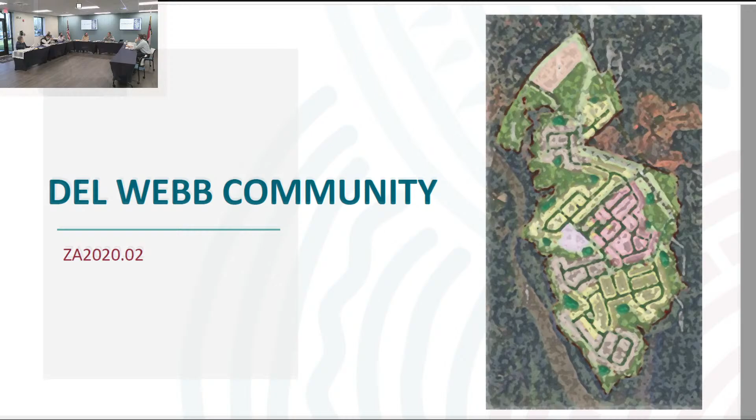Shelley is going to present on behalf of the city, and then the applicant will have 15 minutes to make their presentation, and included within Shelley's presentation will be Kimley-Horn, our transportation consultant. After they've presented, I'll open it up to the board for discussion, and then we'll open it up to the folks here to speak. So Shelley, turn it to you.

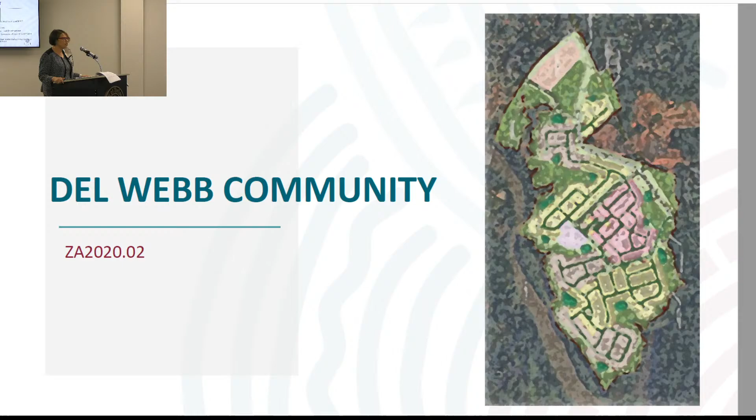Good evening, for the record I'm Shelley DeHart. I'm the project planner for the zoning map amendment, ZA 2020-02, proposed for Del Webb community. The request is to amend the city's official zoning map, changing the zoning classification for tax parcel ID 188444. The subject site is approximately 462 acres in size, located adjacent just south of Armstrong Ford Road. The property owner for this petition is Belmont number 1, US 321 74 Bypass, and Southeast Land Management. The applicant is Pulte Group.

Fred Matrulli is here tonight for Pulte. The applicant's representative is Bridget Grant of Moore and Van Allen.

This request is to change the existing zoning classification for the subject property. The existing zoning is general residential, traditional neighborhood development. This is unusual, having a property with two zoning classifications on it. It's considered a parallel zoning district, meaning today the property owner could request to develop the property either as general residential or traditional neighborhood development. Added on the base zoning is an overlay zone, which ties the subject property to the South Fork Small Area Plan. So with this request, that's the existing zoning.

They are proposing to establish a conditional zoning district that has both general residential and a neighborhood center commercial district within it. The intent is to accommodate an 809-unit, age-restricted residential community that includes a commercial village center located adjacent to Armstrong Ford Road. Now I'm going to take a minute to talk about conditional zoning action itself.

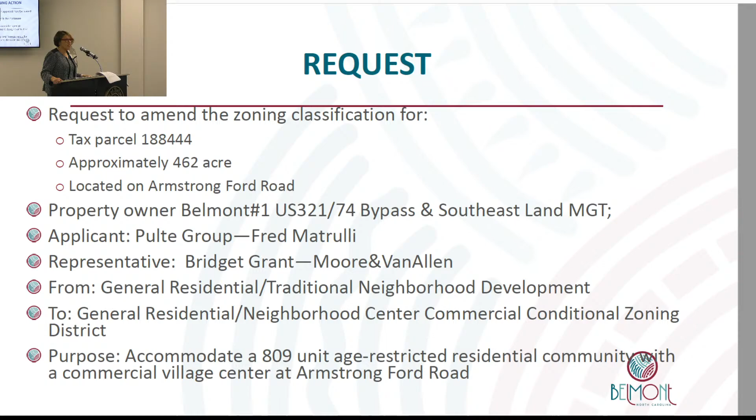There are two methods of reclassifying a zoning designation on a property. There's a conventional zoning process. It is legislative. With this action, conditions cannot be placed on the zoning action, nor can the decision makers consider any promises made that night, such as it only being this use, or even look at a site plan. So if a conventional zoning action is approved, it entitles development consistent with the minimum requirements of the zoning ordinance and all allowed uses within that zoning classification. That is one avenue for rezoning.

The second is a conditional zoning process. It too is a legislative action, but it provides the city with a very good tool to consider special limitations, conditions, and development design tied to the legislative decision. So basically, we are processing a zoning change along with a site plan that conditions can be placed on. The benefits of this avenue are collaboration, predictability, and transparency to benefit the community, the development team, as well as the city's decision makers.

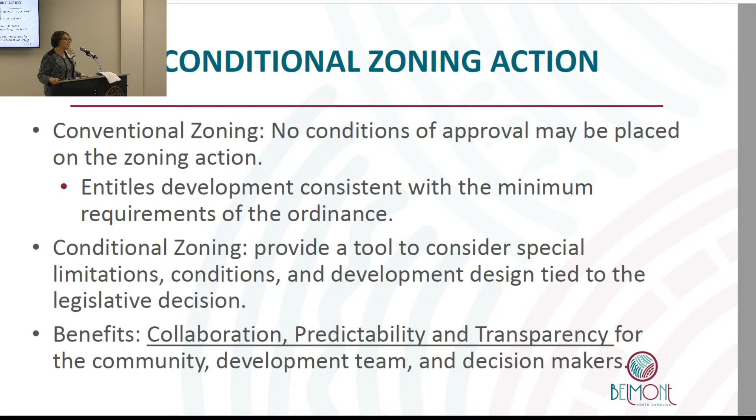So with that, I'm going to start with large pictures. The red star on the location map is the subject property, 462 acres in size. It is bounded on the west by the South Fork. To the north is Armstrong Ford Road. Across Armstrong Ford Road are two communities in Cramerton: Timberlake, an established residential community, and Courtyards at Cramerton, which is a community under development.

The property is bounded on its east side by existing residential communities in Belmont, South Point Ridge as well as Point Crossing. It is also bounded by the community of Amberley, still under development. The southern portion of the property is bounded by the waterfront, again the South Fork, and it is adjacent to about 600 additional acres of undeveloped property.

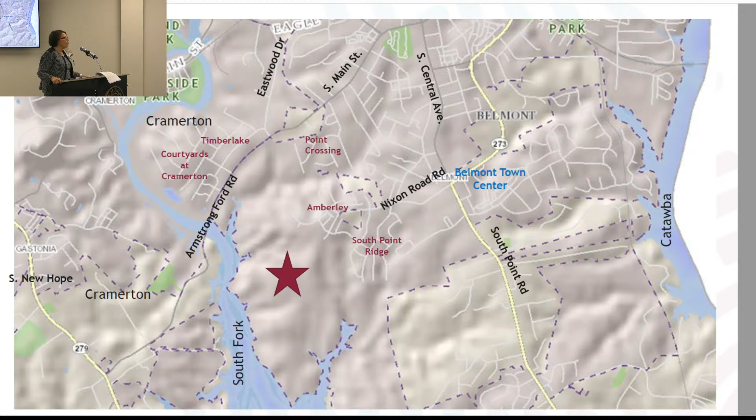The applicant's team approached the city back in 2019 with a vision for a Del Webb community, which is an age-restricted, single-family residential community. One of the first things we established with the development team is we take a look at the zoning to see if it's appropriate. We look at long-range plans, any adopted plans, and so forth as we move forward toward a development project.

The existing zoning, again, is a parallel district. It has a general residential TND designation. The striped overlay ties the subject property to the South Fork Small Area Plan. Many of you were involved in the adoption of the South Fork Small Area Plan. It was included with the update of the Comprehensive Land Use Plan.

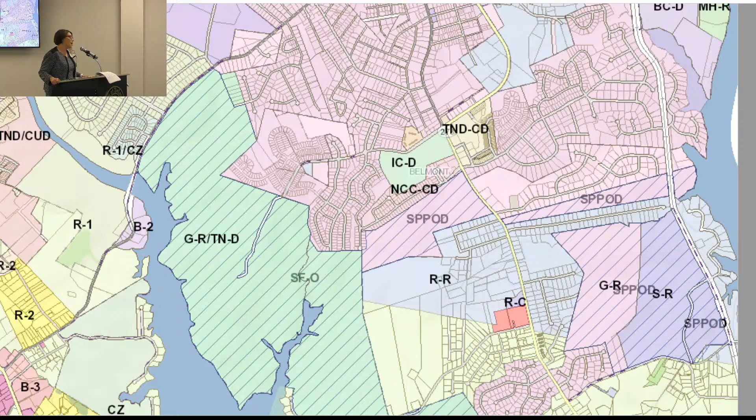Surrounding zoning of the subject site is primarily single-family residential in the communities of Cramerton as well as Belmont. There are a few conditional zoning districts - a small pod across the South Fork, a B2 commercial classification, and at the northeast corner of the property you'll see some bright purple adjacent to Eastwood, north of Armstrong Ford Road. That is an industrial designation, and the property is used as such.

So I mentioned the South Fork Small Area Plan - that is the map to the left. This was adopted in 2018, processed during the comprehensive land use update. You may recall the city was taking large zoning actions on vacant properties zoned general residential to help bring down the density. The property owners approached the city and asked if they could enter into a memorandum of understanding to give them time to develop a small area plan.

They developed and paid for the small area plan, which was included in the comprehensive land use plan. The map on the left, the big white star, represents the subject property. What was envisioned and adopted by the city for this area was a mixed use village as a whole. The subject property has 3 identified mixed use villages.

That's the red area. There's a large one at the intersection of Nixon Road and the future South Fork Parkway. Mixed-use villages are intended to have multifamily development as well as commercial.

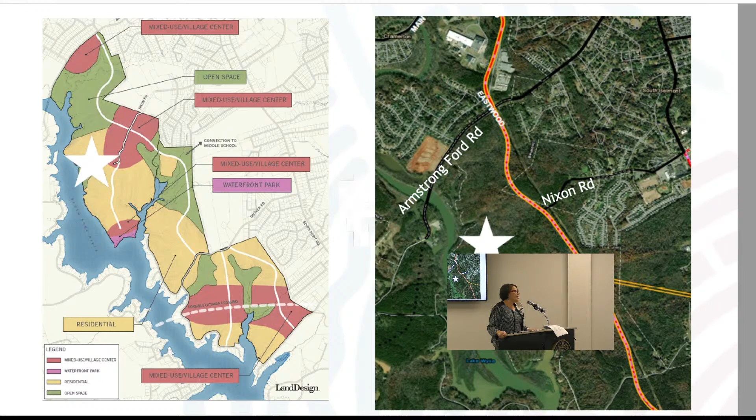The green area on the plan represented the anticipation of open space throughout the area based on environmental constraints such as steep slopes and streams, etc. The bulk of the project, the gold color, is identified for residential use in the form of single-family residential at a maximum density of 3 dwelling units to the acre. So the subject property has these various areas: 3 mixed-use villages, a large area for single-family residential, open space, and a waterfront park.

Now I want you to take note of the white line that follows the eastern boundary of this entire small area plan. That is the South Fork Parkway. That is a very important planned road for the city.

It is proposed to be a 4-lane divided boulevard with landscape median, bike lanes, curb gutter, sidewalk, street trees, etc. This is intended to provide a relief road to South Point Road. It's a north-south running road that goes down the peninsula, again parallel to South Point Road.

So speaking with the applicant, they spoke to us about their vision. We showed them the city's vision for that area. The aerial photograph on the right side of the screen, the orange line, again, is the South Fork Parkway. This is a plan that was provided to us by the local MPO in coordination with NCDOT.

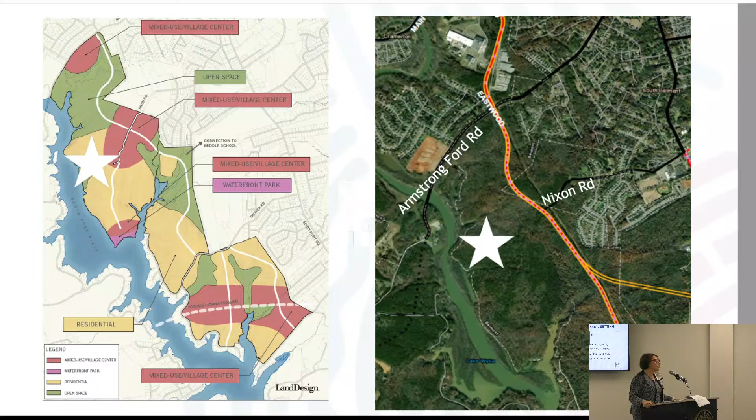Another area of concern, besides the visioning, is the natural setting of the property. This property has diverse topography. It has an intermittent stream located in the northern portion of the property. There's floodplain, wetlands, as well as adjacent to the South Fork, which is considered an impaired waterway.

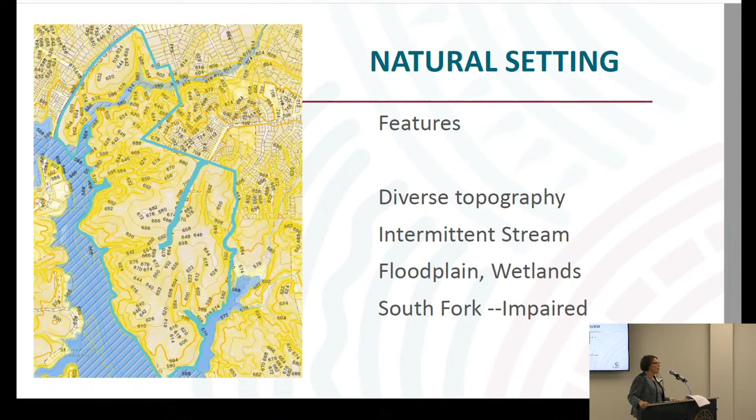After sharing all of this information with the applicant, what they present tonight is the project based on the various plans and visioning of both the applicant and the city. They are proposing an age-restricted community, a Del Webb community, with 809 single-family detached home lots on 449 acres of the subject property. That equates to about 1.8 dwelling units per acre.

There's approximately 100 acres of open space, 106 acres of tree canopy preservation, that's 25% of the site, and it would be placed within a tree conservation easement during the platting and construction plan phase. There's an associated roadway network that does include the future 4-lane divided road, referred to locally as the South Fork Parkway, as well as off-site intersection improvements tied to a traffic study.

And we'll get into some of these topics as we move forward. There's a future neighborhood commercial center on 13 acres where there was a medium-sized planned mixed-use village center. Based on the needs of the developer and the topography and such, the plan does request relief in the area of minimum lot width and maximum block length for some of the internal streets to the development that exceed 660 linear feet.

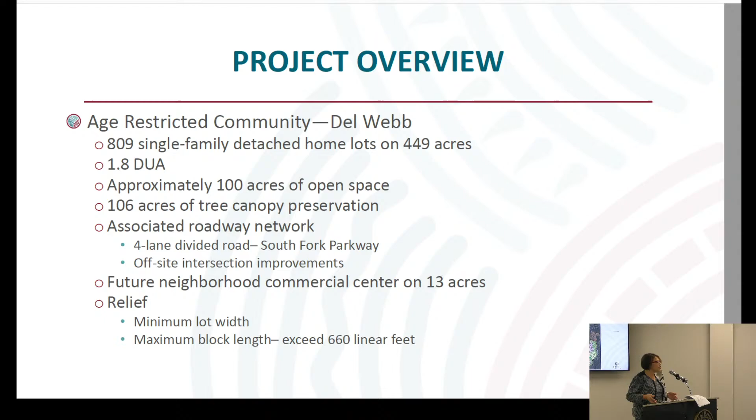So what does that look like in a plan? You have this plan before you, provided on the screen. I'll point out some features. The small area plan identified a medium-sized village center. This is a 13-acre village center. They are proposing to restrict it to non-residential uses.

The project does include a waterfront public park, not at the southern tip as the plan showed, but based on the needs of the development, the Del Webb community, and better public access to a public park feature. They are proposing it in the northern end of the development, adjacent to Armstrong Ford Road.

There's also 2.7 miles of a waterfront natural greenway trail that they're proposing to build. The trail will start in the public park area at the north, follow the waterfront area all the way around the southern tip, and it does end in a location that would have the ability to be connected to if the property to the south is proposed to be developed.

The project, consistent with the long-range plans and adopted plans, does include the South Fork Parkway. There's about a mile of the South Fork Parkway within the project area. They're proposing to build 0.73 of a mile of the full 120-foot build-out, that's the 4-lane boulevard as envisioned. The northern portion that was proposed to connect to Eastwood is proposed to be dedicated as future right-of-way. We will go into details as to why that is proposed this way as we move forward in the transportation section. The project also includes 22% open space, which exceeds the minimum requirement.

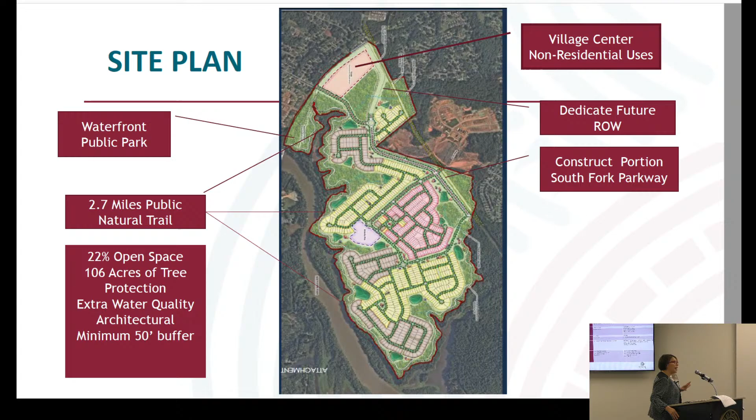This is hard to see from this distance, so I'll turn this way. What's on the screen is a table of performance standards tied to the general residential zone. The use and building types permitted in the general residential zone is residential use, but the building type can be either single-family detached homes or some alley-fed product. That could be a single-family detached home with alley access, or actually townhomes. So if it was a by-right development, they could propose 30% of the total 809 units to be townhomes, that would equate to about 240 units. They're committing to all single-family detached homes that are street front loaded.

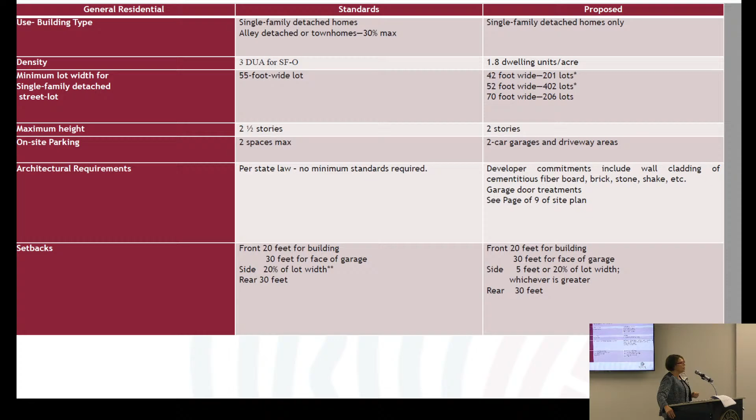The density permitted in the zone, applying the small area plan overlay density restriction, restricts it to 3 dwelling units per acre. They are proposing 1.8 dwelling units per acre.

The minimum lot width for single-family street lots is 55 feet. They are actually proposing 3 different lot types with different lot widths. They're proposing 25% of the lots to be 42 feet wide, which would need relief - this is a request for relief. They're proposing 50% of their lots to be 52 feet wide, again needing relief. The remaining 25% of the lots would be the 70-foot wide lots. So that is one of the areas of relief requested.

Maximum height in the zone is 2.5 stories; they're proposing 2 stories. On-site parking requires 2 parking spaces; all of their units come with a 2-car garage.

Architectural requirements: state law says local jurisdictions cannot request architectural commitments in the form of building materials or architecture. The applicant is committing to architectural enhancements that include building material, primarily cementitious fiberboard with a mix of materials such as brick and stone, enhanced garage door treatments, and so forth. You can see on page 9 of your plans, and I'll touch on it later, all of the proposed conceptual elevations outlined. With regard to setbacks, the front setback is 20 and 30 - the building can be as close as 20, but the garage can be no closer than 30 feet.

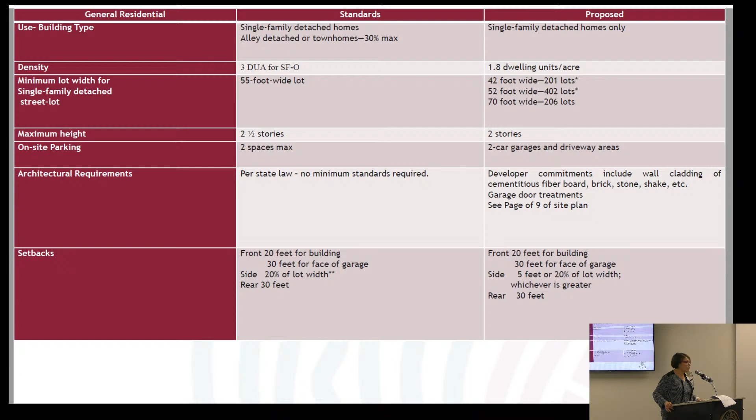The side yard setbacks, at the time of application, were 20% of the lot width. We have since changed the regulations, but we're using what was required at the time of application. The rear yard is 30 feet. So the applicant is complying with the front yard setbacks. With regard to the side yard setback, they are committing to a minimum of 5 feet or 20%, whichever is greater. With regard to the rear yard, they are meeting the requirement of the rear yard setback.

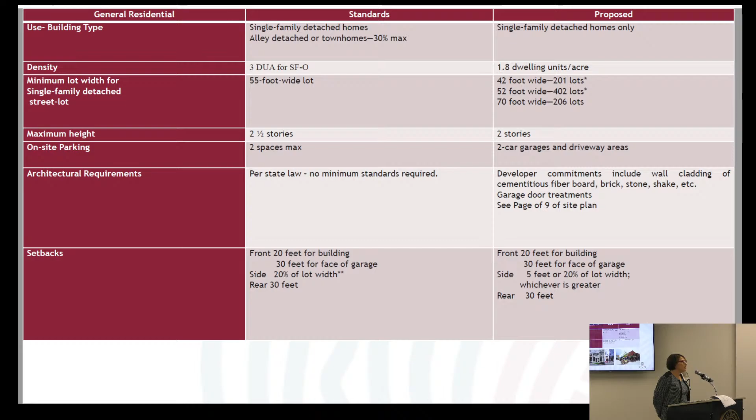So I'm going to take a minute to talk about the Village Center, the Neighborhood Center commercial 13-acre area. The applicant is not a commercial developer, however they are providing some restrictions that would go forth, if approved, to be applied when a commercial developer proposes to develop that 13-acre site. Under the zoning classification, the Neighborhood Center commercial zoning classification is really a mixed-use zoning classification - you could have residential, office, civic, general commercial. They are committing to all non-residential use.

Now, in the traffic study, we identified anticipated uses in that area. It could be a market or a grocery store, restaurant, general commercial, office, medical office, and so forth.

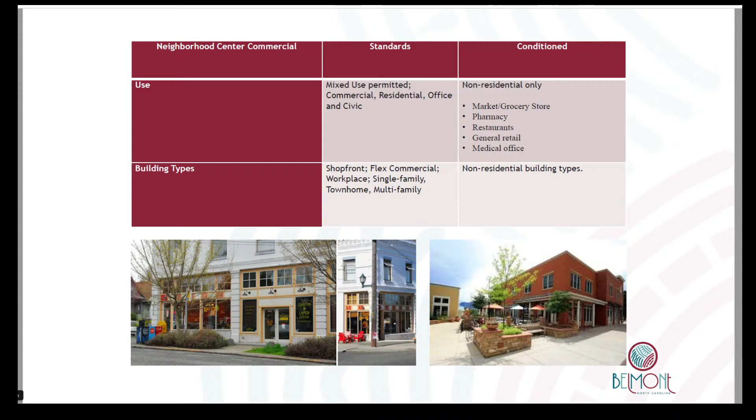So they are willing to restrict it not to allow any kind of high-density multifamily, but restrict it to non-residential use. Building type follows the use. By right, they're allowed to do apartments, townhomes, mixed-use buildings, or commercial buildings, but they are conditioning the project to restrict it to non-residential building types. This project, if approved, would be required to process a construction site plan review permit that would ensure it complies with all the regulations in the ordinance as well as these additional conditions.

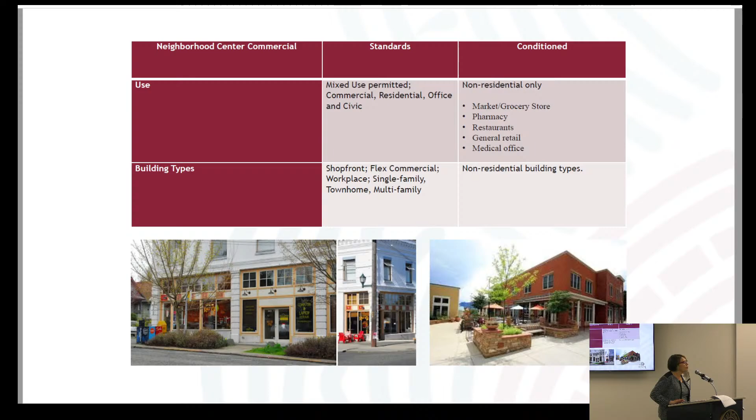So I'm going to take a minute to talk about the environmental aspects. You have at your space a recommendation letter by the Catawba Riverkeepers and Lake Wylie Marine Commission. We were reached out to by various environmental groups and organizations concerned about the water quality of the South Fork. Again, it is an impaired waterway. They have provided a list of recommendations. They met privately with the developer as well as the city, and we've been working together with the development team to bring forth some conditions that they would agree to.

You'll also find at your area a modified document titled South Fork Rezoning Petition Development Standards. They have committed to some enhancements and conditions related to post-construction, active construction, and erosion control measures. They are highlighted in the document before you on page 6 and 7. These commitments, most of them, do exceed local, state, and county requirements. I'd be happy to read those into the record if you would like me to. Otherwise, I'll keep moving forward with the presentation.

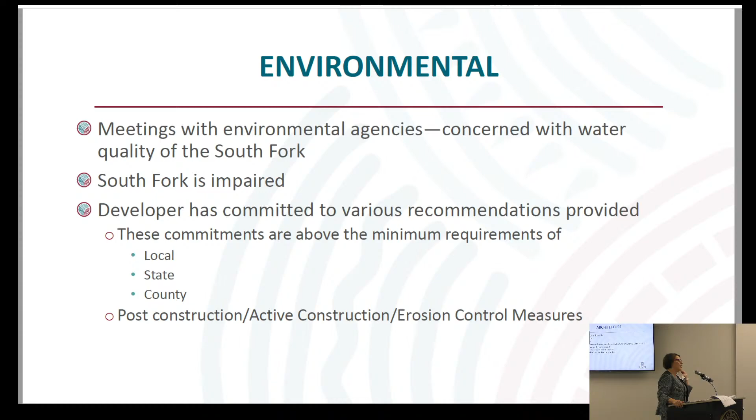So I'm going to take a minute to talk about architecture. The applicant has committed to some architectural enhancement, building material enhancement. The style of homes are very nice, and I'll show you in the next slide. We were invited, some planning board members as well as council members and staff did go out to a Del Webb community, and we were able to walk through the community to look at the types of home, the quality of homes, materials, and layout of an existing community.

They actually proposed some additional enhancement with regard to garage door windows and minimum mix of materials. Staff was very concerned about the small lot product, the 42-foot wide lot product, which tends to have a more prominent garage. So we've worked with the development team to come up with some enhancement that will help reduce the prominent garage appearance. They have committed to one of two features outlined here on screen: a wall gated feature at the garage, which creates a courtyard in the front between the front door and the end of the garage, or an architectural trellis over the walkway to the front door.

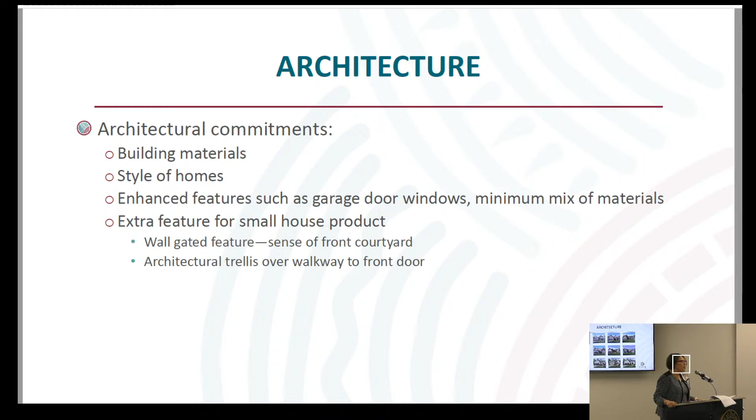So here are some examples. The bottom row are the smaller product. On the lower left, you can see a close-up in your packet on page 9, showing the gate with the little wall creating that courtyard. The middle and far right on the bottom row show the style of architectural trellis, which again creates a vision and feel of a reduced prominent garage in sort of a courtyard active living space.

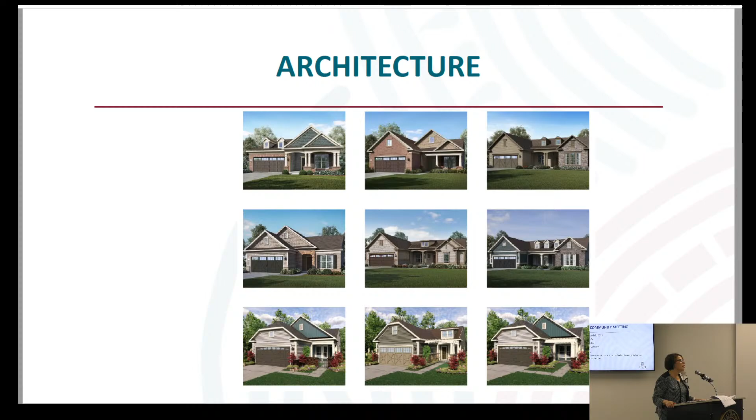The applicant's team held a community meeting on Wednesday, March 3rd. It was a virtual meeting held via WebEx, and it was very well attended, with some great questions and concerns voiced. In your packet, the minutes from the meeting are found in attachment C, but the questions focused on concerns about water quality and actions that could be taken, transportation, anticipated non-residential uses within the proposed neighborhood commercial center, as well as the ability to age-restrict a community. Again, the minutes from the meeting are found in your packet in attachment C.

This brings me to a very important topic on this project, which is transportation. We worked with the applicant to create a healthy hierarchy of roadway that is well-designed with curb, gutter, sidewalk, and street trees. We needed to ensure that included the Southport Parkway alignment. We looked at road connections to existing streets, including Armstrong Ford and Nixon Road, plus a couple of interior roads to the Amberley development for connectivity, and the internal roadway design. We worked hard with them based on the topography to create a grid type of roadway network, also focusing on multimodal elements in compliance with the city's adopted bike plan, pedestrian plan, comprehensive land use plan, as well as the MPO's Comprehensive Transportation Plan, which added the requirement of a public greenway.

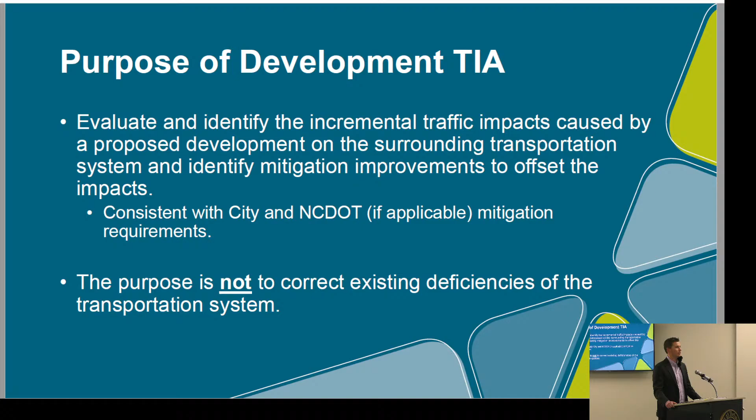Like I'd like to do with all the studies, let's step back and look at what the city's ordinance says the purpose of a development TIA is: to evaluate and identify the incremental traffic impacts caused by proposed development on the surrounding transportation system, and identify mitigation improvements to offset the impacts. The purpose is not to correct existing deficiencies of the transportation system, but to mitigate the incremental impacts caused by that development. It is consistent with both the city and NCDOT mitigation requirements.

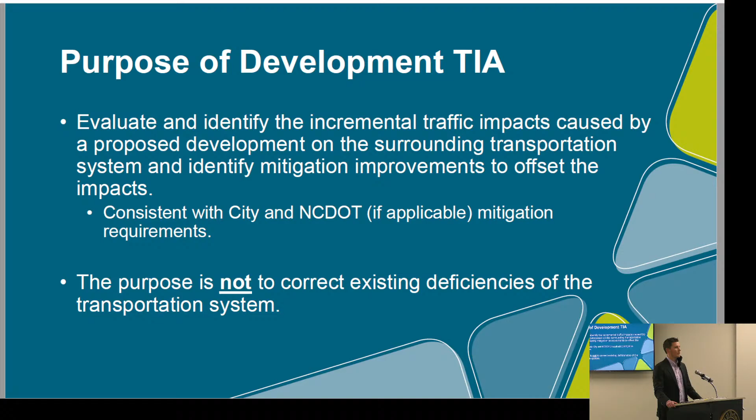As you will see, the City of Belmont, NCDOT, the applicant, and GCLMPO were all involved with the scoping process that dates back to late 2019, as well as through the review and approval process of the traffic impact analysis. The TIA, as Shelley stated, did meet the threshold for both the city and NCDOT for warranting a TIA.

This development, as provided by the applicant, is proposed to be developed in three separate phases. The traffic impact analysis looked at each of those individually and cumulatively. We started off with phase 1, determined the transportation impacts and mitigation associated with phase 1, went to phase 2 and identified the mitigation there, and then went to full build out, which is phase 3. I'll show you what each of those assumed.

For phase 1, there were 400 age-restricted homes, and AM and PM peak hour trips were 117 and 142 trips for phase 1. The build-out year for that, at least for TIA purposes, was planned to be 2025.

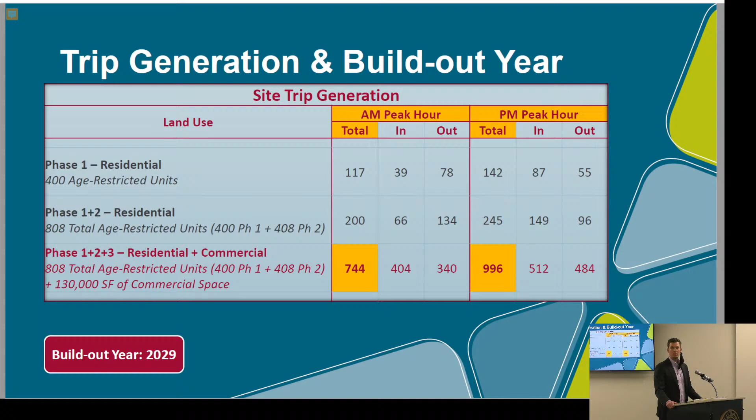Then when we go to phase 3, which included the commercial, you'll see the AM total projected trips are 744, and then for the PM it's 996. That was based off of, like Shelley stated, specific land uses that were provided by the applicant to assume for TIA purposes.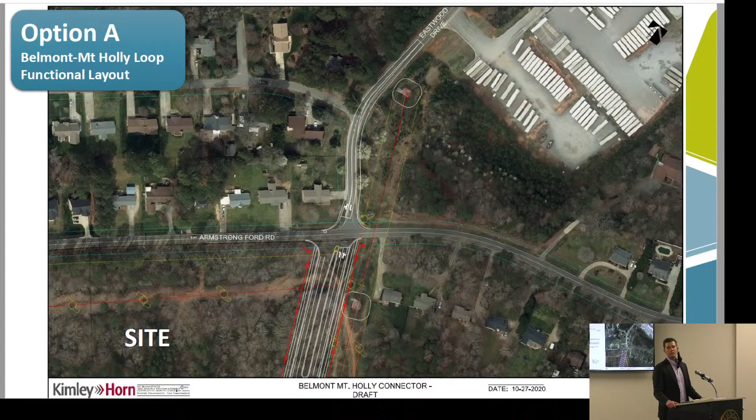However, as we'll zoom in here, NCDOT did provide a letter following their review saying they would not accept it because of the skew that it creates. The proposed option A alignment reverts the connection to a skewed intersection, which poses potential safety and sight distance issues to keep proper alignment. Other alternatives should be examined, including purchase of additional right-of-way from the parcel or relocation of the transmission utility. So either take the house or the transmission pole as proposed, but they were not willing to accept the skewed intersection.

So with that, since then, we have been moving forward with option B.

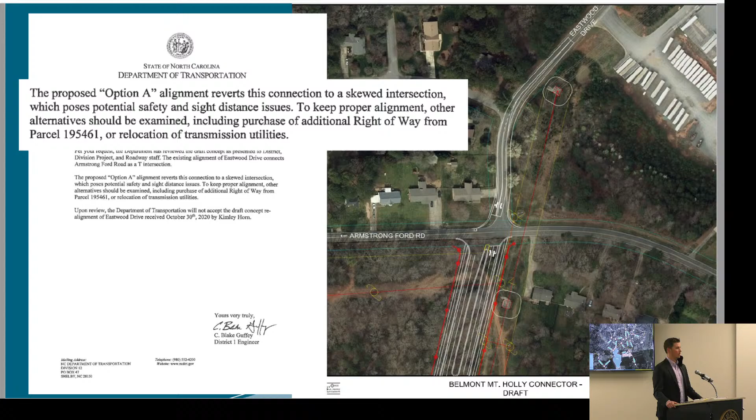Stepping back to look at the TIA specifically, these were the study intersections included—15 study intersections total. An important note is that these intersections were all collected prior to the COVID-19 pandemic, within 2018 and 2019, so it was fortunate we had those counts collected before we knew what was about to impact traffic.

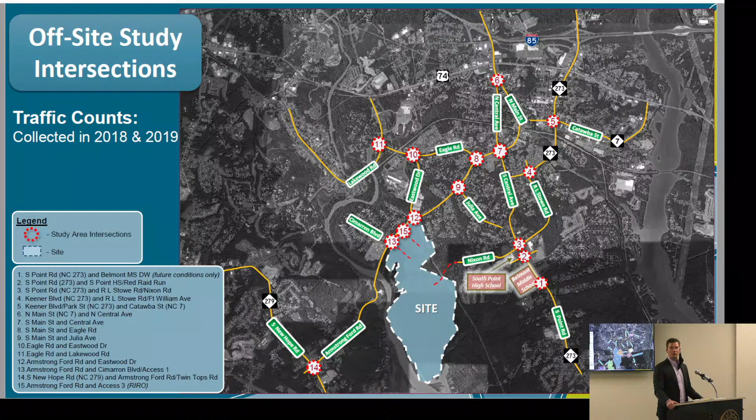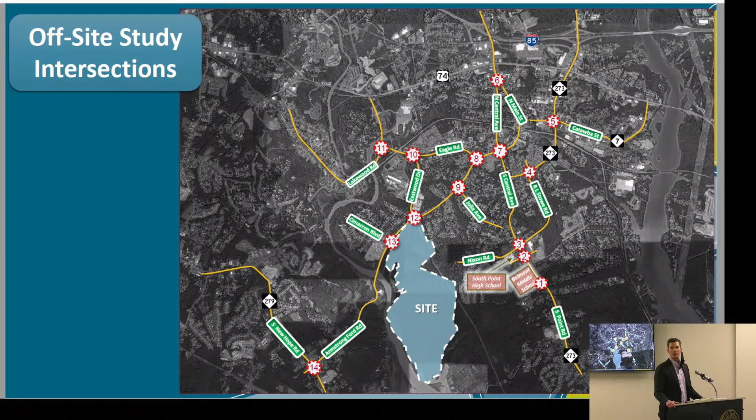Stepping back out again, here are our off-site study intersections. Now I'll get into the results and the intersections we identified mitigation for—these seven intersections highlighted here. I'll jump into each one specifically and talk through the details.

The first is the South Point Road 273 intersection with Nixon Road, R.L. Stowe. Thinking about the connection through Amberley extending Nixon Road, some traffic will come out and hit that intersection. There's a lot of detail on these slides, but the outcome of mitigation here was an eastbound right turn lane—coming from the site to turn right to go south on South Point Road—triggered as part of the Phase 3 mitigation.

The next intersection is Central Avenue and South Main Street. If you're familiar with it, coming from the Cramerton side, from the South Fork River, from the site, going toward downtown Belmont—currently if you stay in your lane approaching that intersection, it puts you in the left turn lane. If you want to go through or right, you have to shift over a lane, which is atypical and against typical driver expectations. Additionally, looking at the volumes, the left turn lane happens to have the lowest volume compared to the through and right turn movements.

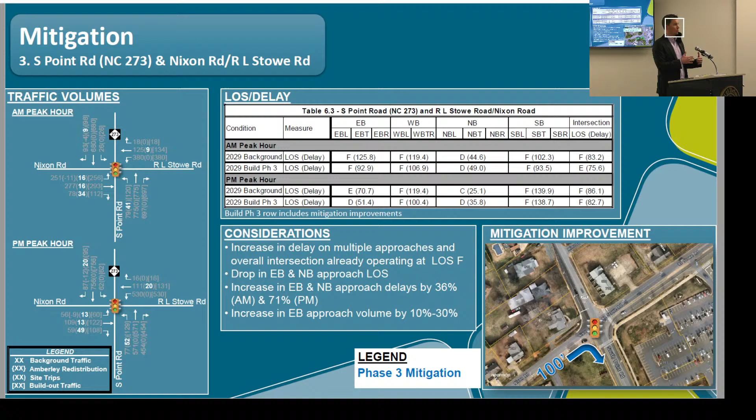One thing we've recommended here is to reconfigure that approach at the intersection so that if you're driving there and would typically expect to be in the through lane, you stay in that lane without shifting over. We'd create a separate left turn pocket, so if you want to go left, you'll get in the left turn lane. Additionally, to add capacity and mitigate the site's impact, we recommend an eastbound right turn lane of 250 feet, increasing capacity. Both improvements are triggered with Phase 2 of the residential development.

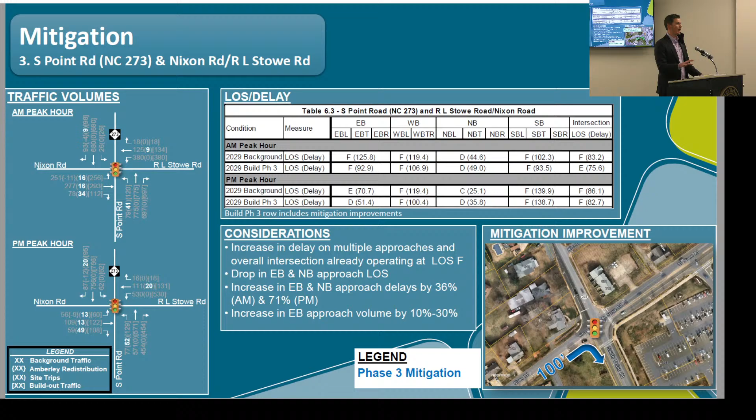One thing to know on this is that based on the traffic analysis, it showed the queue for the right turn lane wanting to be a little bit longer, I believe 400 or 450 feet, something like that. But as we got through the TIA and were talking through the mitigation, it became apparent that constructing that would impact a cemetery just to the west of the church.

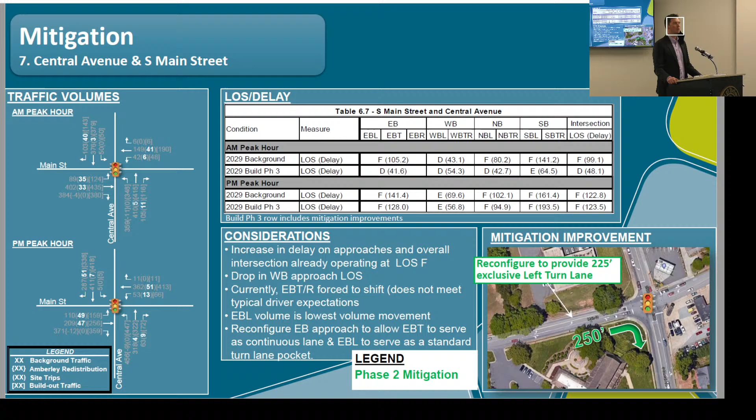So we worked with NCDOT, the city, and the applicant to develop some exhibits to show what we could do. We discussed and agreed upon reducing that storage to 250 feet, which was about the maximum storage that could fit without impacting the cemetery. It still provides that capacity and level of service benefit by adding the turn lane.

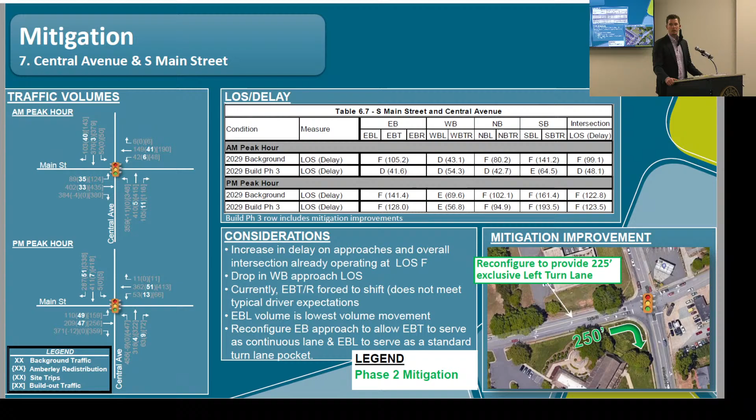The next intersection we'll look at is South Main Street with Eagle Road. We looked at a couple different options for mitigation here. The intersection is signalized today, but it's narrow, constrained, and feels tight. We considered a westbound right turn lane and a southbound right turn lane. Comparing those two, the westbound right provided the most benefit. The southbound right would have most likely removed some of the on-street parking already on Eagle Road. So we're recommending a westbound right turn lane at this intersection as part of the Phase 3 mitigation.

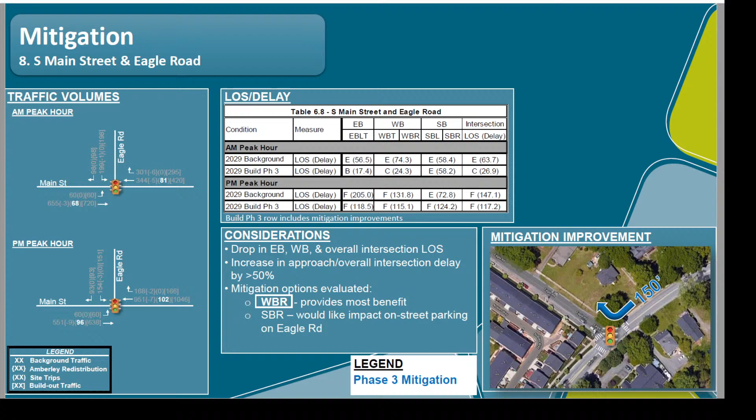The next intersection is the non-signalized intersection along South Main Street and Julia Avenue. This intersection was included because there's some cut-through traffic between South Point Road and South Main Street using Julia Avenue, and the traffic volumes confirm quite a bit of traffic uses Julia.

At an unsignalized intersection, the side street approach during peak hours is typically already bad. There's not a whole lot of ways you can increase capacity and improve it without first looking at turn lanes, and then looking at a signal. Here, it did not meet signal warrants, and the intersection is already operating poorly prior to the site, so looking at a signal to mitigate the site's traffic impact was not something we identified.

But I did identify separating out the left and right turn lanes along Julia Avenue. That significantly benefits right turning traffic, allowing them to bypass the left turning traffic sitting there, decreasing their delay considerably. I'll point out we said maximize — that was really trying to fit in as much storage as possible to allow the right turn traffic to bypass the left turn traffic. We discussed maximizing it between South Main Street and the first residential driveway along the east side of Julia Avenue, which was about 250 feet.

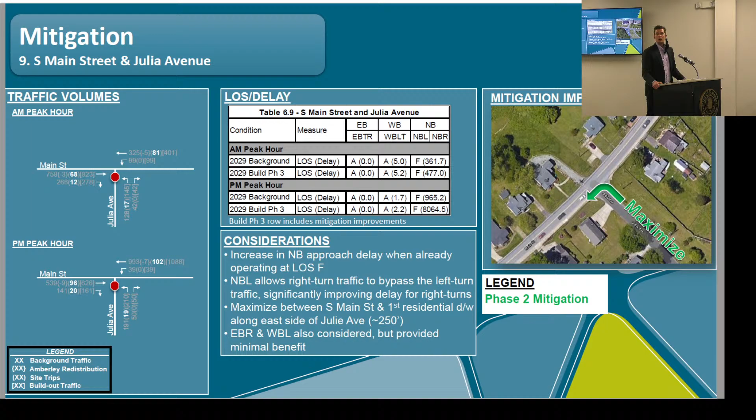Our next intersection is north of the site. As you go up Eastwood where it connects into Eagle Road at a T intersection, there's a lot of left turns to get over to 74 and to the high school. Here there's a heavy northbound left volume already, and the recommended mitigation was to separate the left and right turn lanes and provide a left turn lane at this intersection, which did mitigate the site's impact. This is a Phase 3 mitigation.

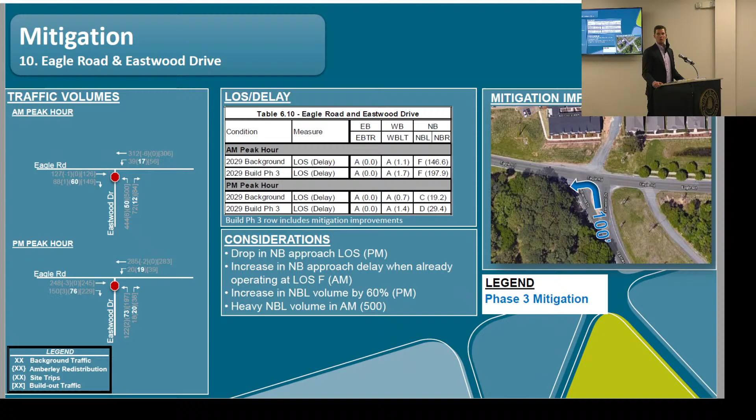So as we get closer to the site, this is the Armstrong Ford and Eastwood Drive intersection. It is unsignalized today, and this intersection is a location where there's heavy eastbound left movements and eastbound throughs, and the site will probably be adding to both of those as well.

So I'll walk through the different phase improvements as part of this one. As part of the Phase 1 mitigation, we identified turn lanes on two of the approaches. A turn lane coming from Eastwood, so separating out the left and the right along Eastwood, and then also...

Adding a left turn lane to turn onto Eastwood from Armstrong Ford Road. And then once the commercial comes on to Phase 3, the traffic signal is warranted at that time, and improves the intersection considerably. In addition, with adding the signal was to extend that eastbound left turn lane from 175 feet to 425 feet for the eastbound left.

And I will say, in phase 1 and 2, it did not meet peak hour signal warrants for a signal. And so there are some pretty heavy delays on Eastwood on that unsignalized approach in phase 1 and phase 2, but it did not meet a signal warrant during the peak hours until it got to phase 3.

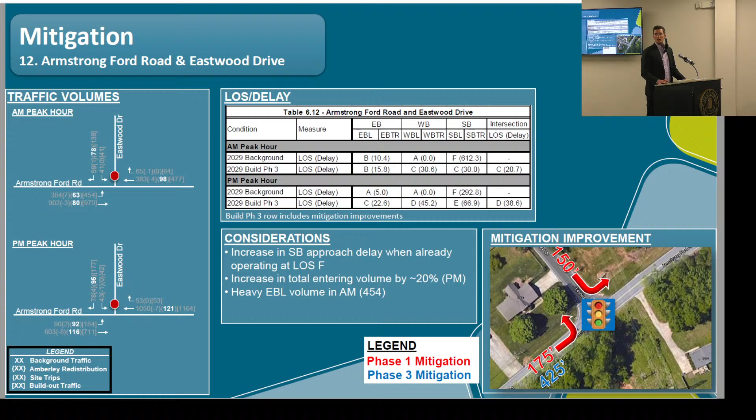Next intersection is moving down, so where access 1 as part of option B is going to tie into Armstrong Ford Road and create a 4-leg intersection at Cimarron. There's phased improvements associated here as well.

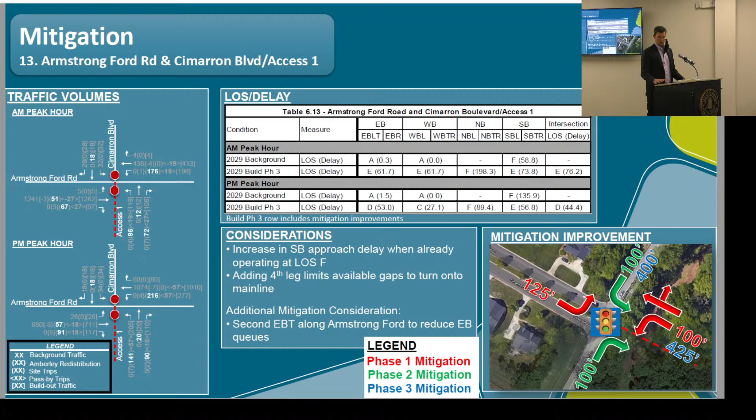And so in phase 1, we're looking at adding in the driveway, and you have a 2-lane approach coming out, so left turn lane coming out of the site, as well as a through right, as well as separating out and creating two lanes coming out of Cimarron. So you have a left turn lane of 125 feet, and then you also have the through right lane coming out of Cimarron.

We did look at a signal warrant at this intersection as a part of phase 1, and the volumes just did not meet the peak hour signal warrant. Typically, when it comes to signal warrants, there's, I believe, 9 total warrants. For volumes, you typically have to meet an 8-hour warrant. What we looked at here from a preliminary standpoint, since we just had peak hour numbers, we looked at just a peak hour warrant, and it didn't meet that.

So typically what we would do is if it meets the peak hour warrant, then maybe we'll go out and collect counts to see if it meets even more hours of the day. But here it did not even meet the peak hour warrant.

So in phase 2, similar thing, it still didn't meet the peak hour warrant for a signal, but more turn lanes were identified for mitigation as a part of phase 2, for the second phase of the residential. And that's turn lanes on both the eastbound and westbound approaches of Armstrong Ford to turn into the site.

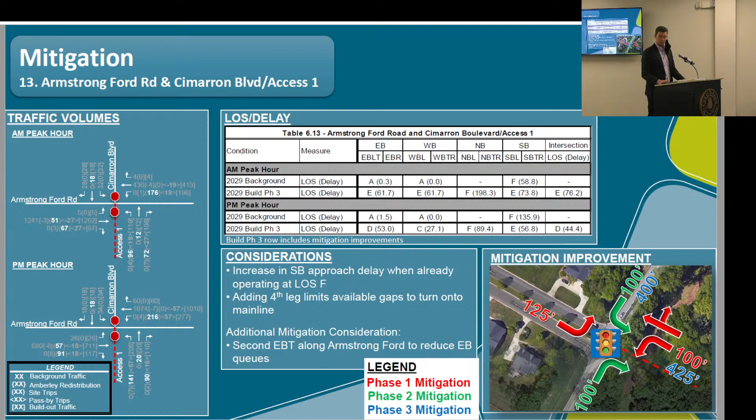So with that, do we do questions now or later, Shelley? Let's do the questions later on then. Okay, thank you. You can't leave.

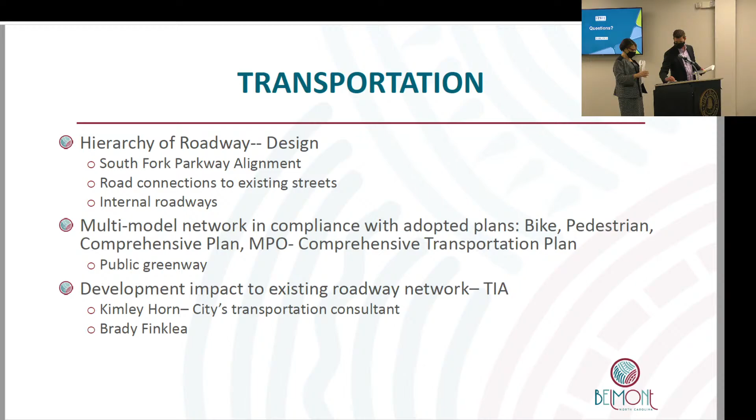Okay, so I will wrap up staff's presentation.

So with any zoning map amendment, we're required to find consistency with the comprehensive land use plan. Staff has reviewed the small area plan and the goals of the comprehensive land use plan and believes that the project findings can be made that is consistent with regard to land use, mobility, parks and recreation, and including environment, based on the added conditions.

There is still one other condition that we would add, a modification related to the age restriction, to state that the development is proposed as, and was evaluated as, an age-restricted active senior community. As such, in the event the development is proposed as a non-age-restricted open market community, such change shall be deemed substantial, and the project would be required to follow Section 15.66 of the Land Development Code for amendment, being reconsidered by both the Planning and Zoning Board and the City Council for decision.

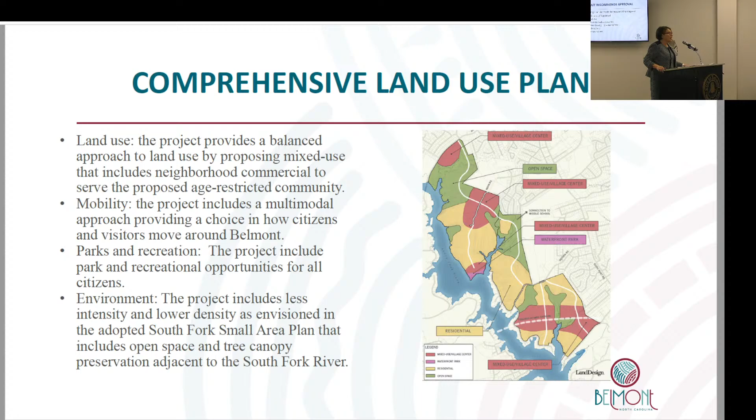With that, there are conditions of approval before you in the area of land use, the age-restricted community, water quality and environment, architectural requirements, as well as the traffic study and transportation-related conditions.

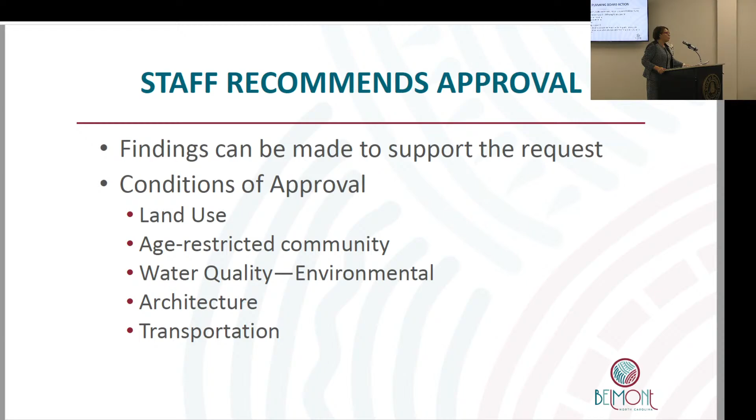So with that, staff is asking that you receive the report, public comments here tonight, and render a recommendation to the City Council. As with all recommendations, this board can recommend to approve as presented, approve with modifications, or recommend disapproval of the project. As a reminder, there are two findings that need to be made: one, that the map amendment is a reasonable request and in the public interest, and that the map amendment is consistent with the goals of the comprehensive land use plan.

So with that, I conclude my presentation.

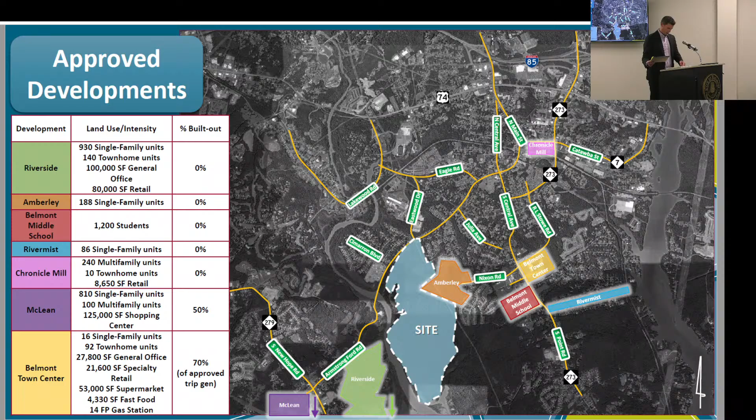We had already had counts collected through a number of other studies that were performed, collected in 2018 and early 2019 prior to Poole Branch Road being closed, at 12 of the intersections, between May 2018 and it looks like the latest one was May 2019. So we had counts collected at all of those between 2018 and 2019 prior to Poole Branch Road being closed in November of 2019.

And we were missing a few intersections that were kind of along the Armstrong Ford corridor closer to the site, which were the three access points, or the three locations right at the site: South Main Street and Eagle Road, South Main Street and Julia Avenue, and Eagle Road and Eastwood Drive.

So what we wanted to do was understand how much of an impact Poole Branch Road had on the Armstrong Ford corridor. The good thing is we had all of the counts collected already prior on the South Point Road corridor, which we feel was the biggest impact, because folks, if they could not get up Poole Branch Road, it would be much more difficult to get around to South Point Road, but they may continue up

South New Hope to potentially get to Armstrong Ford. So we said, let's go ahead and count some of the intersections we had along that corridor, which were Armstrong Ford at South New Hope, South Main Street at Central, and then Eagle Road at Lakewood Road, which were three intersections that surrounded the missing intersections, and let's count those while we count the missing intersections, compare them to the prior ones.

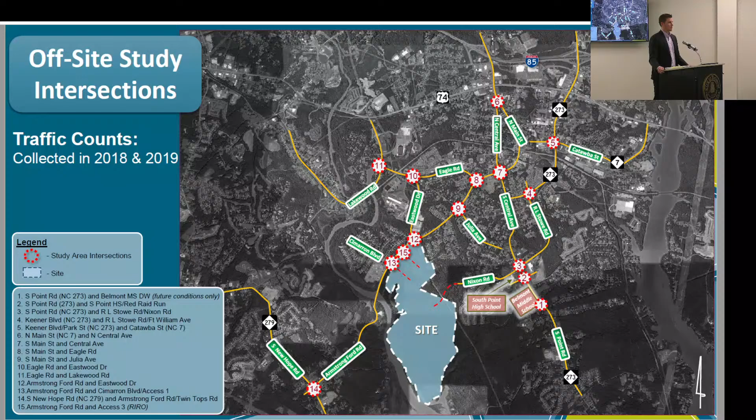It showed that they were either right on par with what we collected previously or a little bit higher. So with that understanding, we talked with NCDOT and the city and determined that the counts collected in December of 2019 were okay to use for those few intersections. Hopefully that addressed those two items, because those were two potential impacts to counts that we had discussed.

So you're using counts that were back in 2019. 2018 and 2019. Have you accounted for any population changes since then? That came through to 2020 to now? Yes, in a couple of different ways.

One being an annual growth rate, so we took those counts and grew those by an annual growth rate, as well as applied the approved developments that we looked at.

And applied the traffic volumes from these approved developments as well. But what I'm trying to say is that you have a lot more people moving into Belmont in general that are traveling in the same travel lanes. And without you having actual traffic count numbers, there's no way to validate the numbers you're using out of the model. So to create the existing counts, those were from actual counts we collected and not from the model. But those are counts that you did in 2018 and 2019, not anything recent, whether that's a pandemic effect or not.

And to that point, does that only count developments that were above the threshold? Exactly, thank you. The approved developments that we used here. So anything that was under the threshold that might have produced just under the threshold would have been excluded though, right? I believe Rivermist was one that was under the threshold, but we still included it. The other ones, I believe all of those met the need for a TIA.

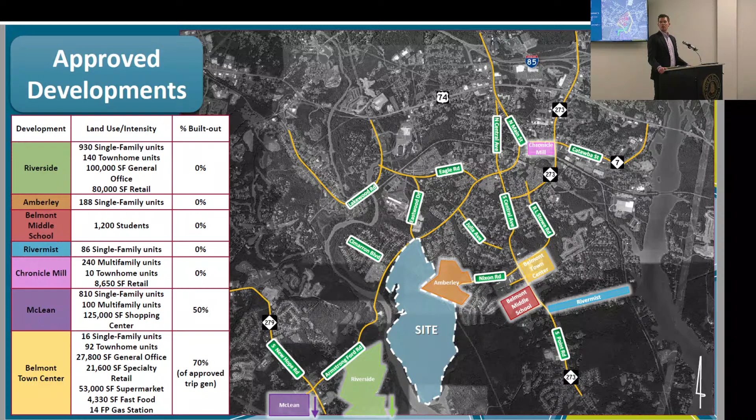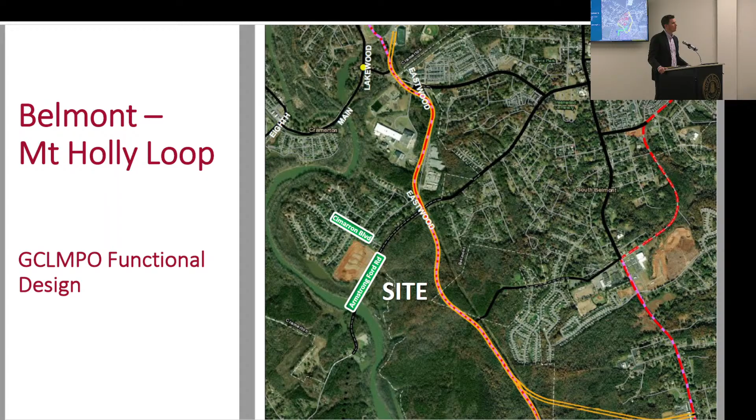Acquire right of way or move transmission lines. Oh, to make option A work? Yeah, so it would be either move the transmission poles to the east or purchase property that is on the northwest quadrant of the intersection.

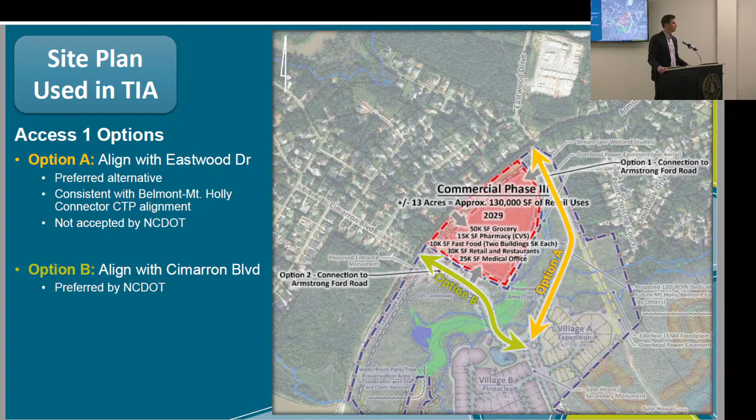Or if NCDOT would have been okay or allowed the design that we showed that snaked through but had a skew, they believe that that created safety issues, so it was one of those three options. Okay.

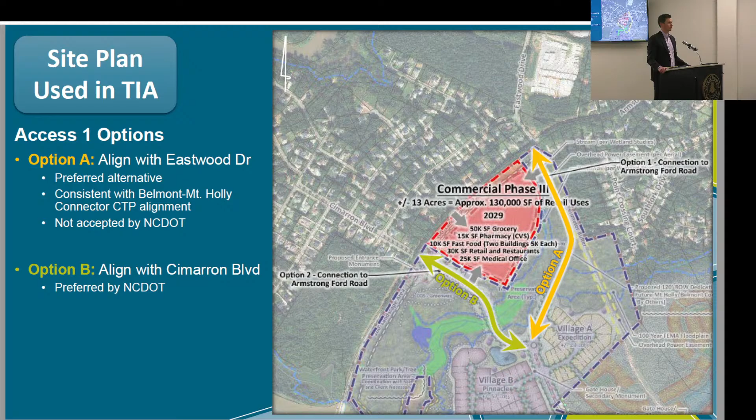I'd like to make a comment about the traffic counts and COVID. It's unfortunate, but our lives these days are unfortunate because of COVID, and we can't stop development because of it. There have been recent developments before this board that didn't have traffic counts like these, and I'm thankful we have the 2018-19 numbers we can inflate to get to 2020, rather than guessing or relying on past studies. I appreciate it—the pandemic has screwed up all our lives, but we're trying to approve and continue development for the sake of Belmont and our community and residents who want to move here.

Kudos to Kimley Horn for finding the numbers and producing the studies. Of the 13 mitigation opportunities identified, the developers have chosen 7 to include as part of their conditions. That's pretty commendable—there have been recent cases before this board where developers haven't done as many as recommended. So I do want to make a comment about mitigation to the developer, or to Shelley.

We've talked in the past about having off-site mitigation be a condition of development. If a development can't do those improvements due to right-of-way issues, we've discussed in-lieu fees. What is the process here? We're talking about 7 pretty critical intersections over the course of 4 to 5 years. Is there a condition for this? Is there a comment from the developer about in-lieu fees—are there some intersections where they may not get right-of-way and would want to enter into an in-lieu fee agreement instead? I'd like to hear from you or the developer on that.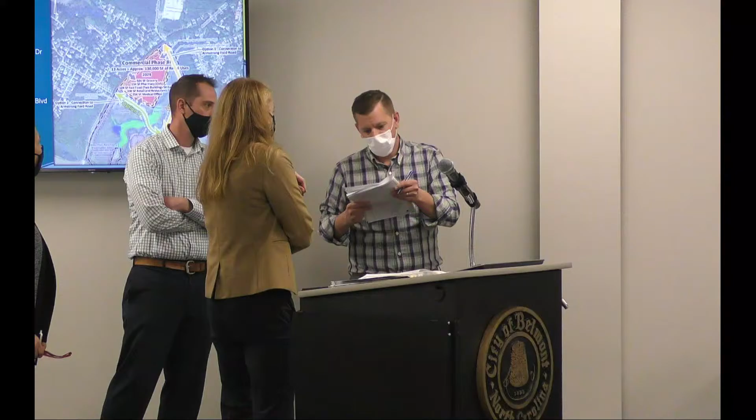Shelley, while they're looking at that, on the lot widths, our ordinance doesn't have an age-restricted component, does it? So we're applying lot widths to any kind of development, whether that be age-restricted or others. That's correct. Okay.

So we're maybe at a point for this board at a time later to consider age-restricted as a unit, as a development, because it may be more prevalent, it may come up that we're trying to apply rules from typical developments to age-restricted, just similar to traffic, right? There are different standards for traffic in and out of age-restricted developments. It may be important to consider that in the future.